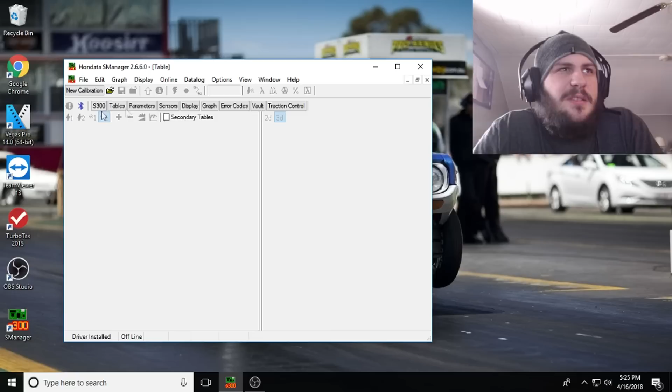So to start off, this is the Hondata SManager software. You can download this right from Hondata's website. This is just the Hondata SManager 2.6.6 version, and when you click it open, I just have it on my desktop here, and there we go. Pull it up, and this is what the SManager software looks like when you first pull it up.

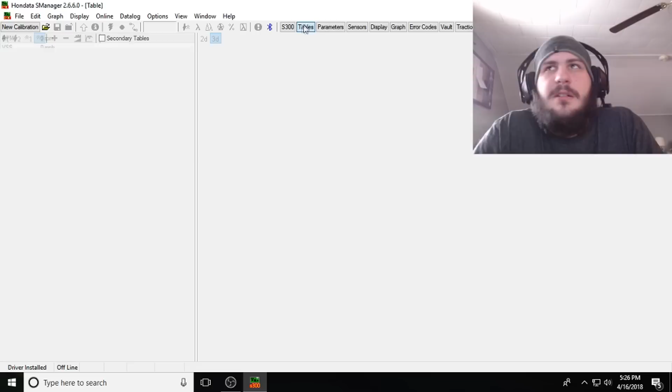You can open the parameters, the tables, everything here. I'm going to minimize this quick so you guys can see what's going on. Alright, so you have parameters. This is the tables section. This is sensors over here, so when you're data logging, you can check out your sensors and whatnot. I'm not going to go over a lot of that stuff quite yet. I'm just going to go over some basics, like I said.

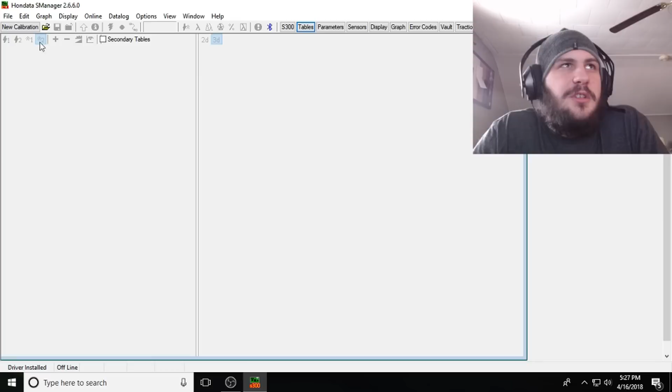Alright, and to start with Hondata, when you first open it up, you're not going to have anything populated. So I have the tables opened right now, and they are blank. This is just how it comes until you open up a calibration. Now, to open up a calibration in Hondata, you can either go to File, New, or you can just hit New Calibration right here. And it'll give you a drop-down box with a bunch of different base maps to start from. I usually always use the stock ITR one, which is the first one here, and click that to open it.

And then you have your tables all highlighted here. This is the 3D table, and then you can switch this over to 2D if you want to check out some more stuff there. And then you have 4 different maps up on the top left. The number 1 lightning bolt is going to be your low cam ignition map. This ignition map is for non-VTEC operation. So this is where the car is going to be running before it crosses over into VTEC. Or if it's a non-VTEC engine, it's going to run on this ignition map non-stop.

To tune the low cam ignition map, you need to be on the number 1 lightning bolt here, and to tune the high cam ignition map, you have to switch over to the number 2 lightning bolt, which is for the VTEC operation. So wherever you have VTEC set, say at 5,000 RPM, VTEC will cross over and it'll switch from the number 1 map to the number 2 map, and then you'll have to tune the VTEC side of the map.

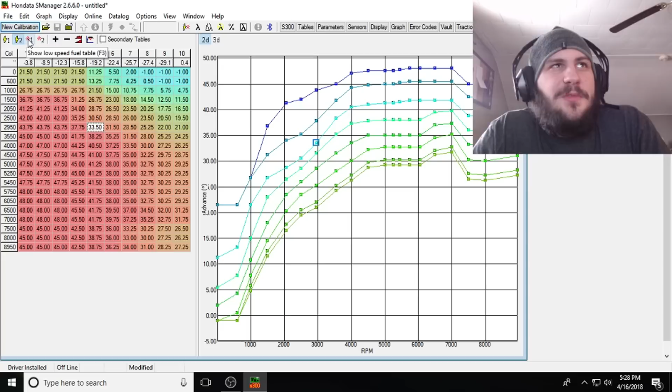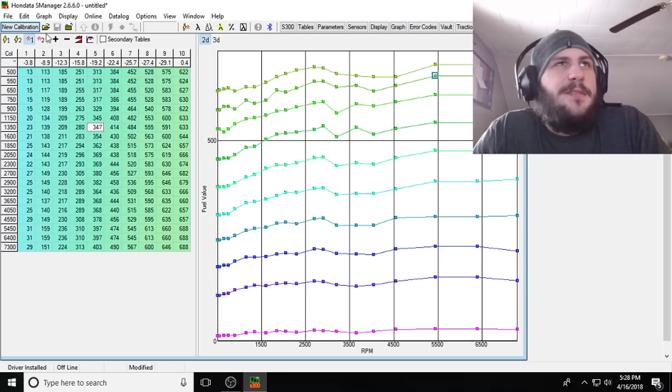Same thing goes for fuel over here. This is the number 1 low speed fuel table. This is for non-VTEC operation. And then the number 2 is for the VTEC operation here. So that's pretty much the basics of the fuel table. Like I said, you can tune 2D or 3D maps here as well. So yeah, pretty simple stuff here.

The only thing that's different with Hondata compared to Crome is the vacuum here on the top rows. You can see it starts at negative 3.8 here, and then it goes 8, 12.3, 15, 19.2, and it goes backwards. I don't know why that is. If anybody knows, you can let me know. But normally the table would go 29 over where 3 is and 3 over where 29 is. I don't know what the bug is there with Hondata, but that's just how it is.

This is where high vacuum is, and this is where low vacuum is. So wide open is going to be over here still, and idling and cruising around is still going to be over in this region here.

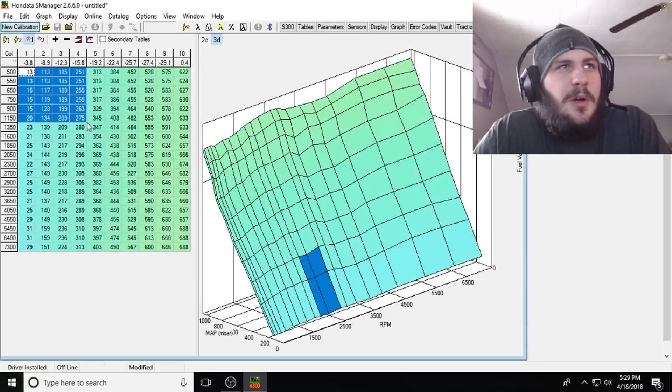Now this feature here is just to increase your selection. So if you're tuning the idle part of the table, you can highlight here and you can increase or decrease your fuel with these 2 buttons here, or you can right click the selected portion and hit adjust and change it that way, and you can go throughout your fuel map and tune it. Same thing with ignition, highlight it, right click, etc. Now there are a few different tables that you can use.

You can use the normal fuel table and ignition tables like you see here, or you can switch over to see your recorded data, so when you data log or when you record. Normally if you were hooked up to the ECU, these would be highlighted right here, and you could click data log, which is this lightning bolt here, and you can start a data log.

And if you have your wideband plugged in, this will actually show all the corrections on the map, so you can go drive around and it'll populate all these cells saying, hey, you need to pull 10% in this column, you need to pull 3% in this column, 5% here, etc. So that's pretty cool that you can do that and show your data logged lambda. That's pretty much what these two tables are.

The first one here is just going to show what the air fuel was at what cell, and then you can see in this table the suggested corrected amount. And this is your target lambda, so if you have this all set at 14.7 and then you go back to your corrected table and these are all 13.7, you're probably going to have to pull 10% out of the region in order to achieve the target lambda, which is on this table here.

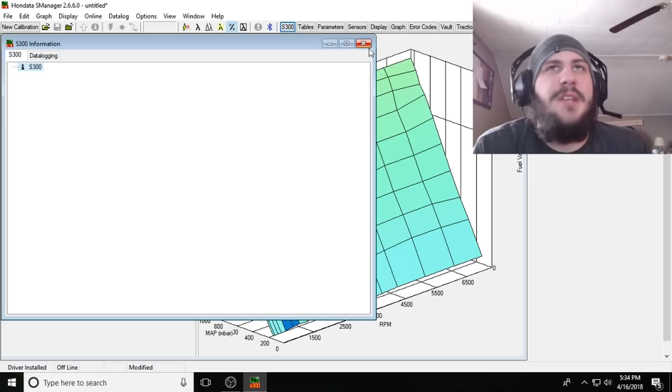So we're going to go on to parameters now. These are all the different parameters that you can change or modify on Hondata. There's a lot of stuff going on in here, and I figured I would go over some of the basics and the ones that I actually use. Some of these tables you don't really need to mess with unless you have a really radical setup. But for the majority of people tuning on Hondata, I would say any car that's under 600 horsepower, you're only going to adjust certain tables.

And if you have a dual injector setup or something crazy, something radical, you can do more with a lot of these other tables. But I'm just going to go over some of the basics on the parameters quick to show you guys what they all are and what you can do with all the different parameters.

So this first table here is analog inputs. When you buy an S300, it comes with a little wiring harness that you can plug into the top, and it gives you 8 different inputs that you can use for any different thing. So if you want to use a different air temp sensor or a different coolant temp sensor or anything like that, you can use any of these inputs here and set it up that way. Like I said, I don't usually use any of these analog inputs. I don't really need to, because a lot of the factory stuff works good enough for me.

So the second table here on the parameters is the boost control. The boost control here is for if you have a 3-port or 4-port boost solenoid wired into the ECU and you have boost by gear components actually soldered into the ECU. If you have all that stuff soldered in and everything wired correctly, you can actually enable this and set up your boost controller with the duty cycle here and all these different tables.

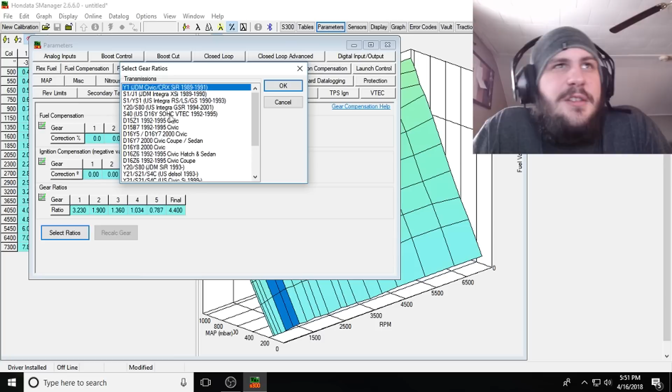The next table is gear compensation. So if your car is running richer in 5th gear or 4th gear or 3rd gear, you can adjust it here. I don't usually have issues with any of this stuff. I don't touch this table usually, other than just setting the gear ratio. So like my car has a GSR transmission, so we would select that, and yeah, that's all I would really do. I wouldn't touch any of this other stuff. Like I said, you don't really need to a lot of the times, at least in my experience.

This is the idle table. This is pretty simple. You can just set your minimum idle speed, so the idle air control valve will actually make sure the car doesn't go below 850 RPM. From my experience, the idle air control valve is a little bit lazy, so if your throttle stop on your throttle body is set a little bit too low, the RPM can actually dip below that 850, and then it'll come back and try to catch itself. That's usually because the throttle stop is not adjusted properly.

So what I usually do is I turn this off to set the idle, and then I set it with the throttle stop, and then I'll set this back to the normal spot or wherever the car likes to run smooth. I'll play with this guy, the duty cycle and the idle air control valve, just until the car runs smooth and doesn't idle surge.

But like I said, the main thing I do is I turn this freaking thing off and then set the idle with the throttle stop on the throttle body versus playing with this. I know some people just play with this to adjust the idle, and that's not technically the right way to do it. This is kind of just a quick and dirty way to get your idle set. But yeah, that's pretty much it for the idle table. It's pretty simple stuff.

Now this is the ignition compensation table. This is going to be the same exact thing as the fuel compensation table, except with ignition. So if your intake air temperature gets above like 140 degrees, it'll start pulling ignition out of it because hot air tends to detonate easier, and you would have to pull ignition timing out if your intake air temperatures got, say, above 140 degrees.

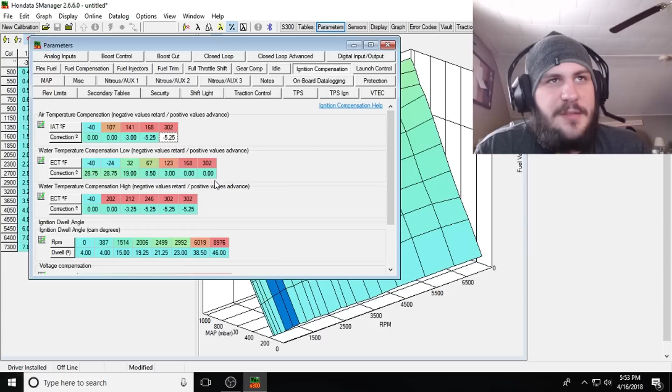So like I said, I don't usually touch this stuff. It's already set up pretty good out of the box, where you don't really have to mess with it at all. Same thing with the water temp. It's going to add ignition in when it's cold and then pull ignition as it warms up. If your car is overheating, it's going to pull timing, etc.

Next table is the launch control table. So this you can set up so it's always on, and it'll go off the vehicle speed sensor. So if your car is below 6 miles an hour, it's going to activate the launch control, and you can set this at, say, 6,500 RPM. And then you can activate the two-step along with it.

So the anti-lag, not the two-step, but the anti-lag where you get the flames and boost generating and all that kind of stuff, is right below the launch limiter here under fuel and ignition settings. And I usually set this up around 200 to 300 RPM before the actual limiter. And you can play with this and say add 50% of fuel and pull 30 degrees of timing. This is usually a good base to start with to see what the car likes and how fast you can get it to build boost.

Because that's really the goal with this, is you want the car to be able to build boost on the launch control, and that's why you have to add fuel in and pull ignition out. So the explosion happens at the completely wrong time, and the car actually builds a load to build boost.

So under that, we're going to have a burnout rev limiter. This is actually pretty cool too. You can actually set this up to be always on, or you can set it up with your brake switch. So if your e-brake is pulled when you're doing a burnout, your rev limiter is going to be lower than the actual rev limiter. So say my rev limiter is at 8,200 and I'm in the burnout box doing a burnout, and I just want to hold it to the floor to keep the tires spinning good, and I don't really want to be revving the engine very high. You can actually set this to be lower, say 7,000 RPM instead of 8,200.

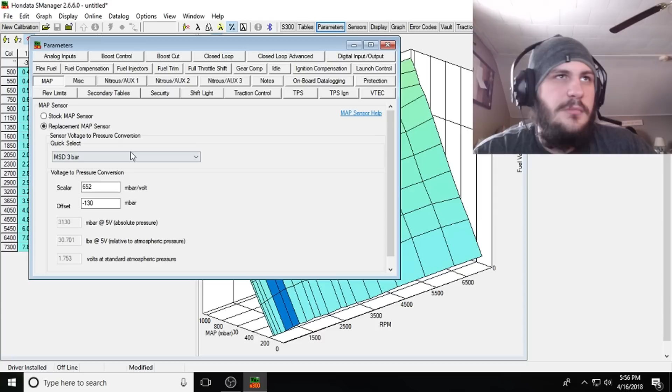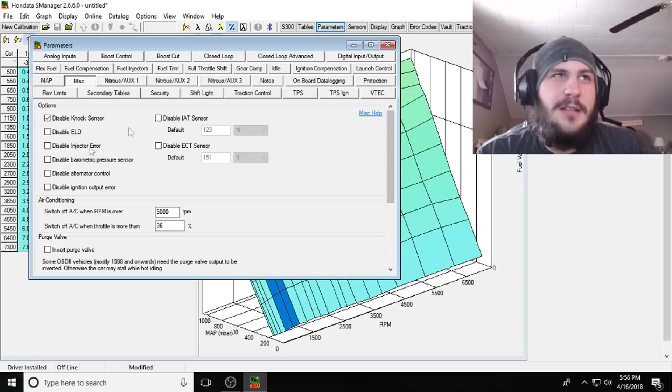So the next table here is the miscellaneous table. This is where you would disable some sensors. Say like my car, I don't have a knock sensor, so I would disable this. And that's really all I would disable. You can disable a bunch of stuff on here that you shouldn't need to. Usually if the car is set up properly and everything is working, a lot of the stuff you won't even need to disable unless you don't have a spot on your motor for a knock sensor. Then you would obviously delete it there.

You can set up your speed sensor here. So if you have a different size tire on it, you can set up like a 20% correction or 10% correction, so the speedo reads accurate to what the car is actually doing. So if I have a really big 26-inch tire on the car, I can change this number to have the speedo read correctly. You can also change the fuel pump priming time here.

So if you have a super big fuel line on the car, like a -10 or a -8 feed line, you can set up the priming time of the fuel pump to be longer, so it fills up the bigger fuel line. But like I said, most cars you don't even really need to touch a lot of this stuff. 2 seconds is plenty for the priming, and the speed sensor correction I don't usually mess with because it doesn't bother me that much.

These are more auxiliary tables, inputs and outputs for like nitrous. You can actually set this up so if you have an arming switch for your nitrous, say if it's on a TPS or a switch or a button or anything like that, you can wire this into the ECU, and once you hit that button, it'll actually change the amount of fuel and ignition in the tune. So that's another cool feature on Hondata: you can have pretty much a separate table here for your nitrous. Whenever you're not hitting the nitrous button, it's on your normal tune, and whenever you are, it'll switch over to this guy.

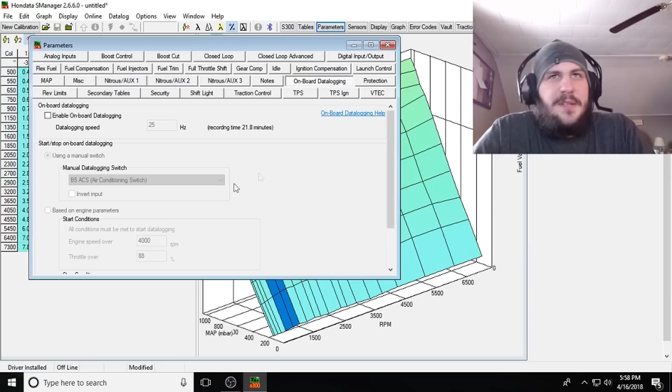Next table here is a protection table. This is actually super cool because if your wideband's wired into the ECU, you can set this up so, say you don't want your car to run leaner than a 12.0 air-fuel ratio above 10 pounds of boost. You can set this up, and if it notices over a 12.0 air-fuel ratio above 10 pounds of boost, it'll cut power to the engine and end up saving your engine and prevent you from melting a piston probably. So that's a super cool thing that you can play with on Hondata as well.

You can set this up whatever way you want, but yeah, so on my car I have it set up so if it goes above 12 pounds of boost, or above 10 pounds of boost, it'll cut the engine power. You can do the same thing for overheating. So if it gets above 212 degrees, it'll shut the car off.

You can override the fan. So the cooling fan here, you can set it up so it comes on at 180 instead of 199, or you can set it up so it only comes on at 210, etc. And then turn it off as the car gets accelerating. So once the car is above 31 miles an hour, it's going to turn the cooling fan off, because you don't usually need a cooling fan on when you're driving down the road. That's it for the protection table. We'll move on to the rev limiter table.

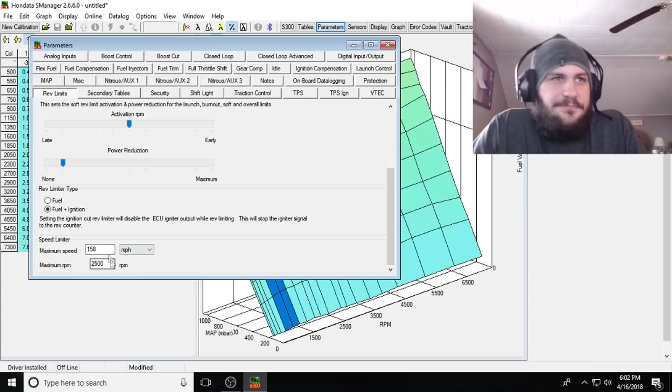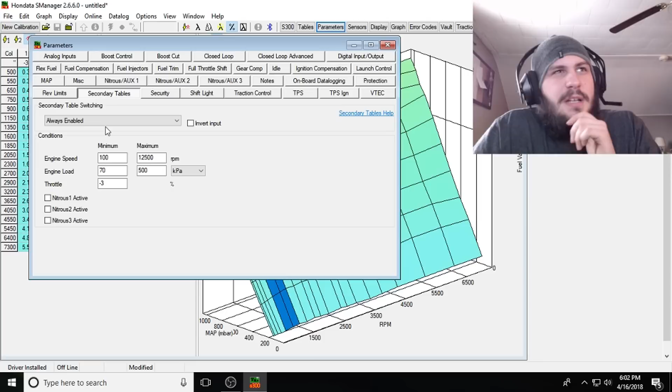Speed limiter here, pretty self-explanatory stuff. Don't go over 158 miles an hour. Or you can set it at 200 and do whatever. Secondary table switching. This is where you can actually set up your second table. So say if you have an E85 tune and a pump gas tune, you can set this up on a switch, so it'll switch the tune to a different fuel map and ignition map. I don't usually mess with it. I just run my shit on E85 all the time. But you can set all this stuff up, which is pretty cool.

Security, this is a table I also don't mess with, but on this table you can set it up where you have to pump the gas 10 times for the car to start up, or pump it 5 times, or hold it at half throttle to start the car or whatever. So if your neighborhood is a bad neighborhood and you have a lot of theft, this may be something you want to look into changing.

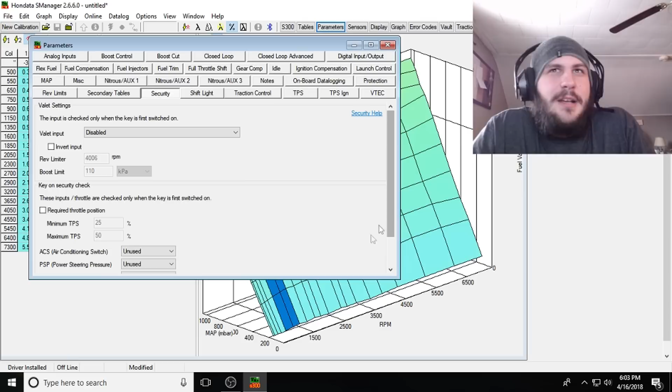But honestly, this is more of a pain in the ass to me, because I'll forget what I set it at and end up forgetting how to start my car. Like, oh fuck, I gotta pump the gas 3 times, and I gotta hit the brake pedal twice, and then I gotta hold it at half throttle, and then it'll start. That's just kind of what these are here. Like I said, I don't usually mess with it.

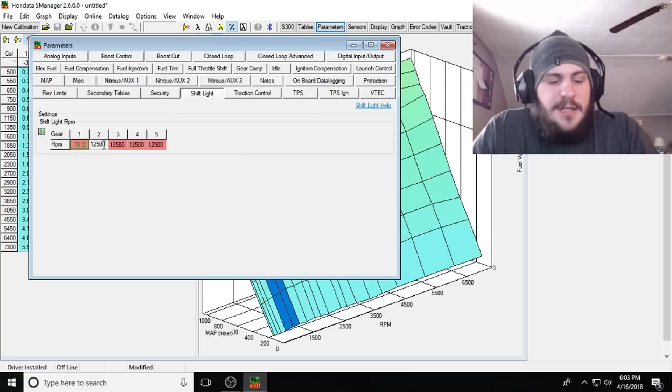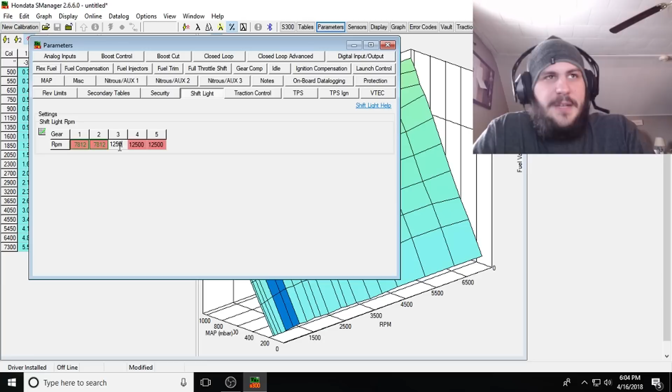This is the shift light table. This is pretty simple. This will just flash the check engine light whenever you hit a certain RPM. So say my rev limiter is at 8200, I would set the shift light at like 7800. So whenever I see the shift light, it'll be right before the rev limiter, and this would probably keep me from hitting the rev limiter. If I see that check engine light in the corner of my eye, I'd be like, hey, time to fucking shift, Hunter. So I would probably set these at 7800, or just leave it off. It doesn't matter either way. It's just a cool feature that you can use.

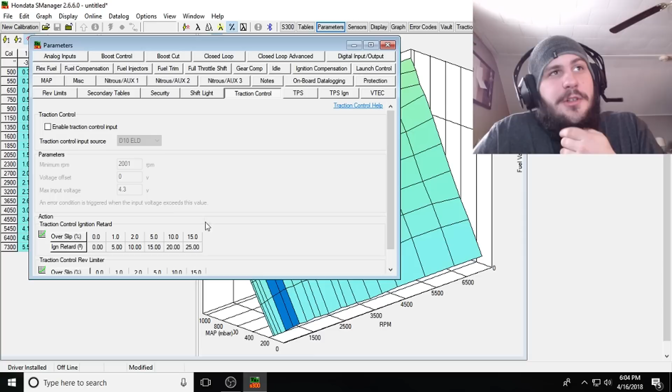This is a traction control table. This is actually a really cool thing on Hondata as well. You can actually set this up with a rear wheel speed sensor. So you could put a speed sensor on the back tire, and it'll take the input from the speed sensor off the transmission and the input from the rear wheel speed sensor, and will actually combine the two. So if you have a higher wheel speed in the front than the back, it'll actually pull power out of the tune to help with traction control.

So if you have wheel speed, it'll pull power just enough to keep the two speed sensors in line with each other, and keep the car from wheel spinning. I don't usually mess with it, but it is a cool feature that you can use.

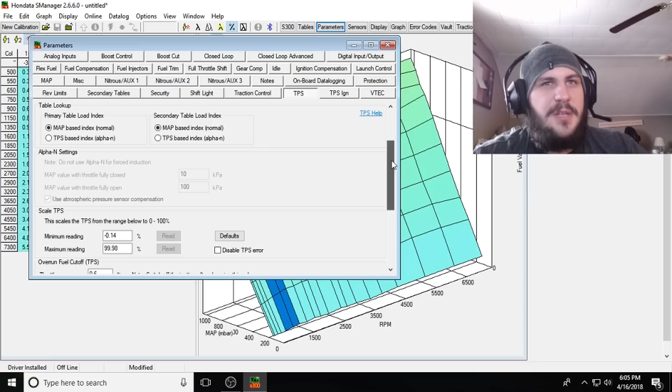This is a TPS table. You can scale your TPS or calibrate it on these and set up your fuel cutoff. So like if your throttle is below 0.5%, it'll turn all the fuel injectors off because you're just coasting down the road. And this is also for like tip in and stuff like that. The tip in will kick in at a certain throttle percentage or whatever.

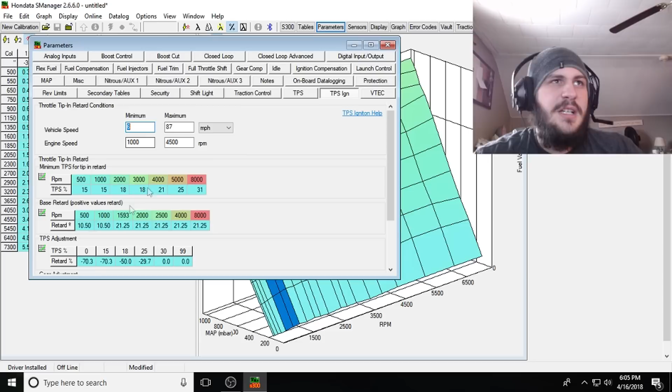But like I said, I don't usually mess with a lot of this stuff because it's already preset for you. But if you have a really radical setup, there's a lot of stuff you can adjust and play with. This is just another throttle position table that I don't mess with at all. Like I said, you can play with a lot of this stuff. You can sit on here for days and just play around.

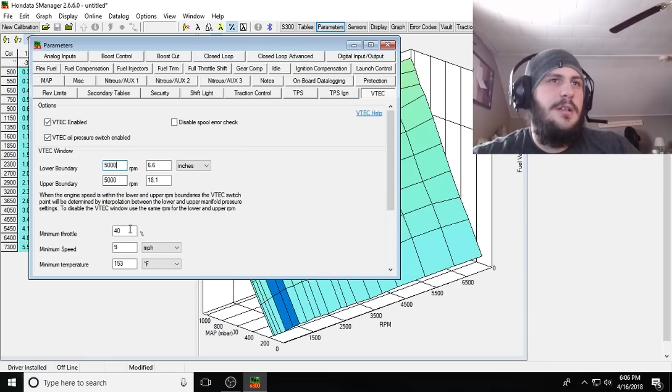Last but not least, this is the VTEC parameter table. This is where you would enable or disable VTEC, and you can set your VTEC point. Say like my car is at 5,000, I think. I always usually set the upper and lower boundaries the same, and I don't have any issues. So VTEC will kick in at 5,000 RPM. And then you can set this up so like VTEC won't hit until you're dedicated to a pull.

So like if you're just cruising down the highway at 30% throttle, it's not going to be in and out of VTEC if your car has like a B16 transmission that's really short geared and you're sitting at 5,500 on the highway doing 80. It's not actually going to cross into VTEC until the throttle meets this requirement here, 50%. And it's also not going to hit VTEC until the temperature gets over 153 degrees.

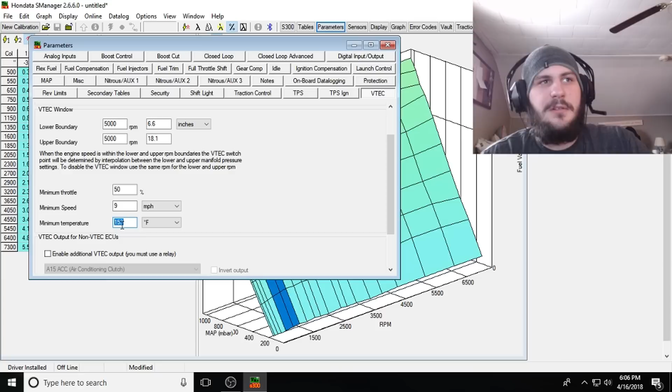And one last cool thing here too is when you have an S300, you can actually use like a P06 or a P05 or a P75 ECU that's non-VTEC and still have a VTEC motor and an output to control VTEC. You would just have to use any of these outputs here to activate VTEC instead of the A4 where the standard VTEC wire would go on an OBD1 computer. Which is cool because that saves you money on an ECU if you don't have one. And if you only have like a P06 or something, you can still run your VTEC motor with your P06.

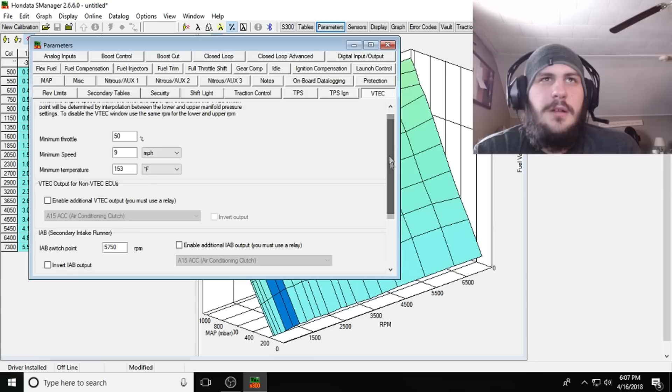So yeah, that's kind of some basics here with Hondata and going over some of the parameters. I'm going to go over data logging and stuff in a separate video, so you guys can look forward to that, and how to hook up your data logger and how to start logging with Hondata. But I figured I'd go over some basics and show you guys around Hondata, so maybe you guys can get your feet wet yourself.

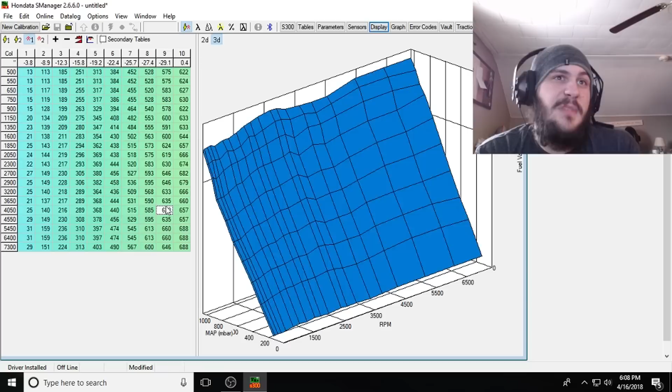I figured I would just do this because I had a lot of questions on how to use Hondata and tuning with Hondata. So this is just going to be one of those basic kind of videos that shows you the software and shows you some of the different parameters that you can adjust on Hondata.